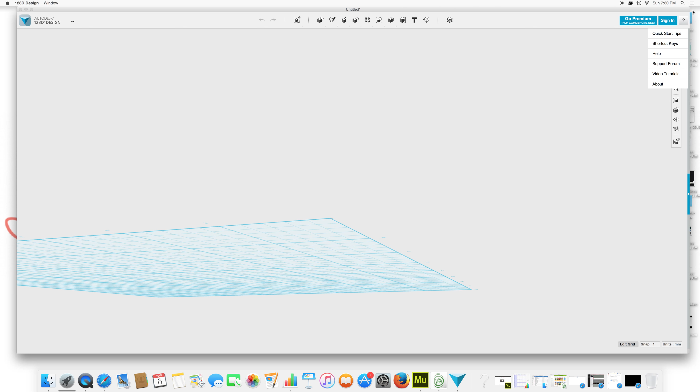First thing to note is to get familiar with your view cube. This will be your navigation around the entire page. If you ever get so far gone that you don't know what way is up, you just hit the little house, it returns to the center point.

Pan hand moves the page. Orbit is the same as the view cube. It just lets you go in one swift motion. I find it sometimes is the easiest way to get lost. So I like to slowly move the view cube. Your scrolly mouse will let you zoom in and out. You won't really need that zoom tool. You can just use your mouse.

Now, notes, measurements, whatever you're working in is fine. Just make sure it's consistent. You measure your glasses in centimeters, you work in centimeters; measure in inches, work in inches. Up to you. When creating, I find it easiest to use the polyline or spline tool and just draw what you need and then extrude it.

So, for example, if you were creating sunglasses, I'm just going to create my beautiful sketch as fast as possible just to get the idea of it. I'm using this as my centimeter grid, so measure out the space you need so that you know if you need your whole eye to be 4 centimeters. Note what 4 centimeters is in squares. Every square is 0.5 of a centimeter, if that helps.

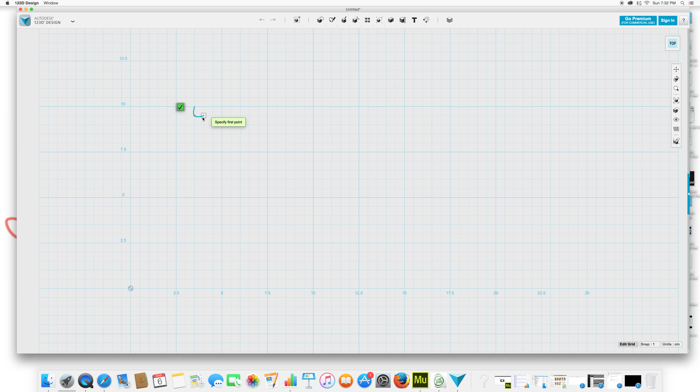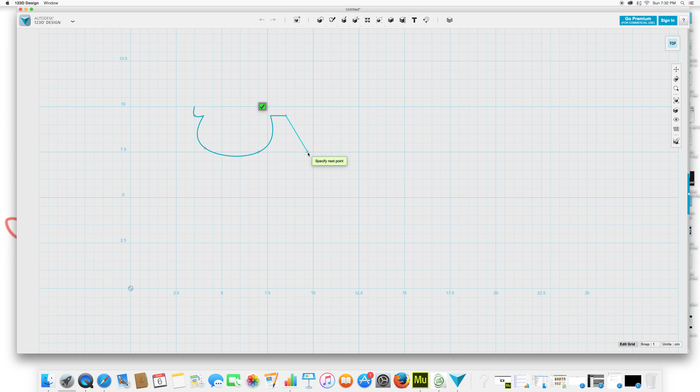So when making your awesome glasses, you're going to use a tool to create your shape. Now, I'm clicking between the polyline and spline by just double clicking. The spline tool lets you do curves where polyline is straight, but I'm on the spline so I don't have to keep changing it. So if I want it to actually be straight, I double click and then I just click to recontinue my shape. So here I went over 1.5, so 1.5.

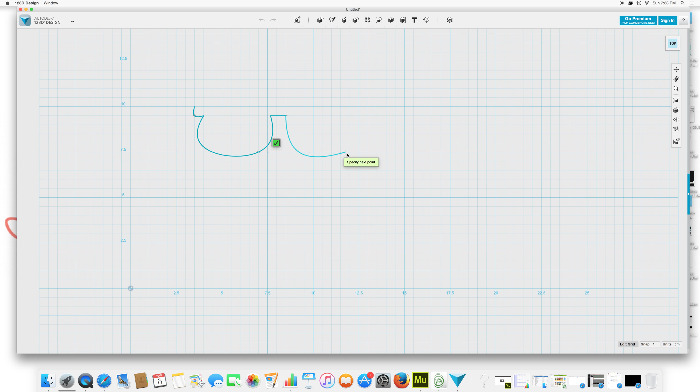Yeah, so sometimes it's really good to start mirroring and figure out what you are doing. So 1, 2, 3, 4, 5, 6. I like symmetry. 1, 2, 3, 4, 5, 6. Look at that. Beautiful. And again, for a straight click, you have to double click. So click twice, and then click back on it to continue. And then I have my lovely ending point. Let's go straight, click to continue. Voila. First step, close. Great.

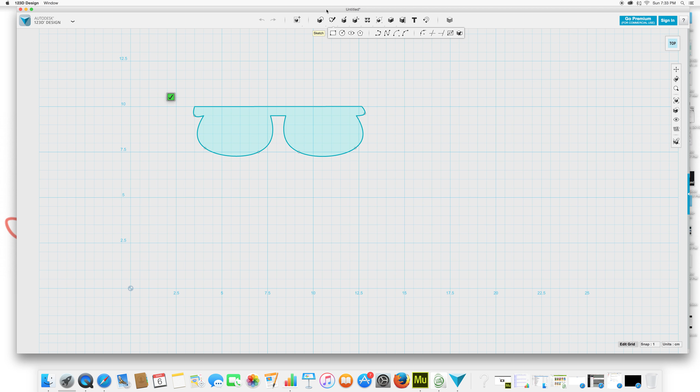Now I could then create my second sketch of where my glasses are going to be. Obviously, I want to see. I could easily use the ellipse tool to create the cutout, or again, I can freehand. It makes no difference, whatever you're more comfortable in. I find this ellipse tool sometimes more frustrating because you have to really know your measurements, per se. So I'm a visual person, so I like using the spline.

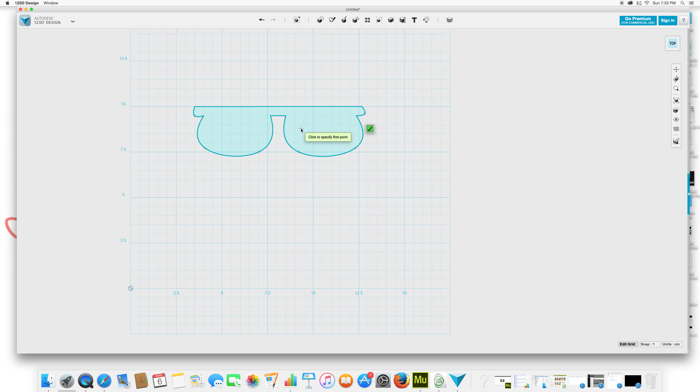But you're going to create basically an inside sketch and outside sketch. So you could choose to do it this way, and then you're going to create your second shell. Straight. Beautiful. Essentially what's going to happen is that you'll raise one and you won't raise the other. So please make sure you spend time measuring it. Obviously, I'm just eyeballing this right now, as if you do it per measurements, it will take a lot longer, which is great if you're actually planning on wearing them. But for the purpose of this tutorial, it would take too long.

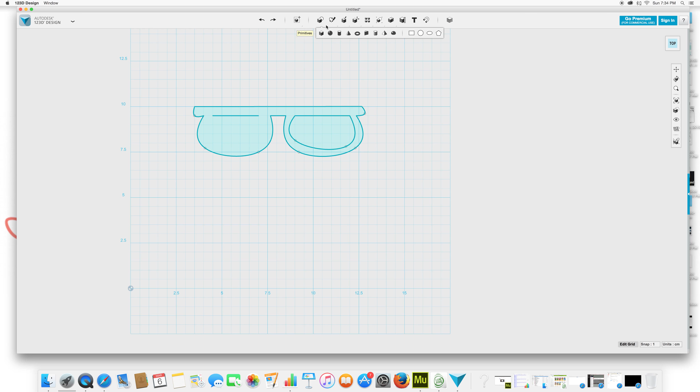So just note how far over your clicks are going to be for each thing. And I'm trying to be perfectionist for no reason. There we go. Okay, close. So now that I have multiple things, I go back to my move tool here. So this section here, they're all separate. So I can use my extrude tool and choose to focus on different parts.

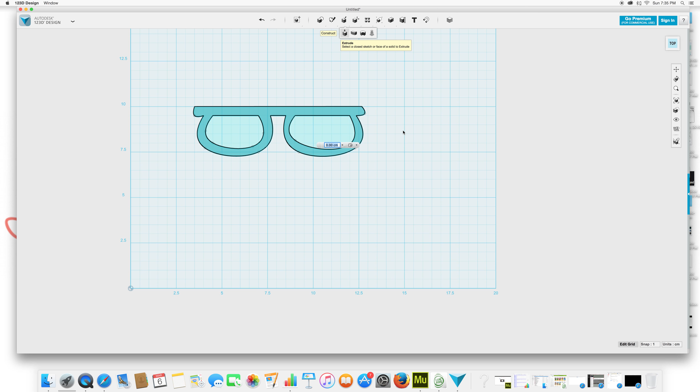I'm going to focus on this, and now here's your thickness of it. So note with the ruler, how thick do you want it to be? 1 centimeter? It might be too thick. I'm going to do 0.7 of a centimeter. And it's going to raise 0.7 of a centimeter. That's what that looks like.

Obviously, things to note. Currently, you are seeing my sketches, and you are seeing this as outline only. So if I hide the sketches, you'll see outline only. And if I show material and outline, you'll see our lovely glasses. Great basic frame to start.

Couple things to note. How are your hinges going to connect? Do you need a place for a hole to connect, or are you going to have a cutout that they connect in? Obviously, if you're going to have a place where they latch in, then you'll need to create that shape for it.

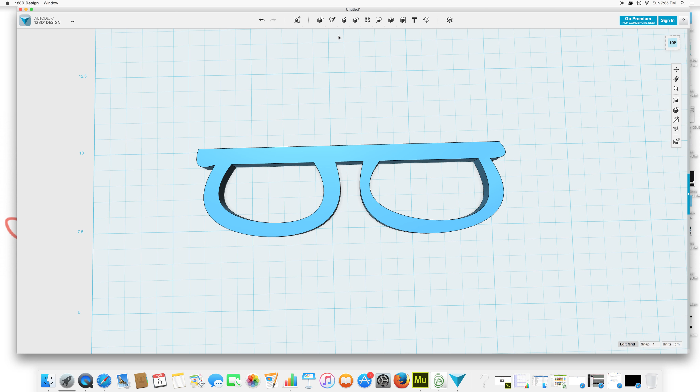To modify basic things, for example, if you wanted these glasses to not be flat and you wanted them rounded, zoom on in.

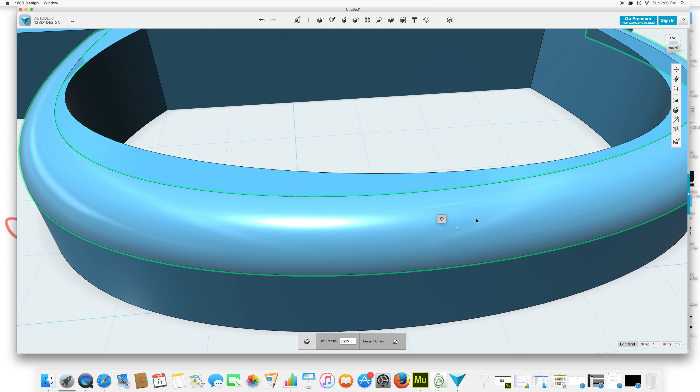Select the side and grab your fillet tool. Sometimes if you find you're too far out, it won't work, so I always zoom in to know what I'm doing. I find it's much easier to work with. Then you can start zooming out to actually see if it looks like what you want it to look like.

See, it looks different from very different angles, but that's what it actually looks like. It starts to round it. You can do it on all the sides. You just need to actually select the line. So first click is the shape, second click is the line, and then the fillet tool is rounded, chamfer is hard, and that creates your shape. You can look at the actual radius, so do the same for each one.

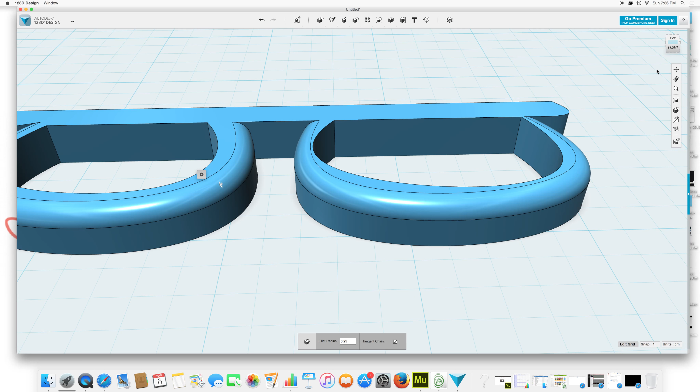And now we start to create it. It's the same process for your sides. Do one, and then extrude it twice. I'll do that really rough so you have a visual of what that looks like. But again, I don't know how you're hinging these together, so if you need to add an extrusion where they're going to have a little screw, or if you're going to have a hinge that they hook into, you have to decide that part.

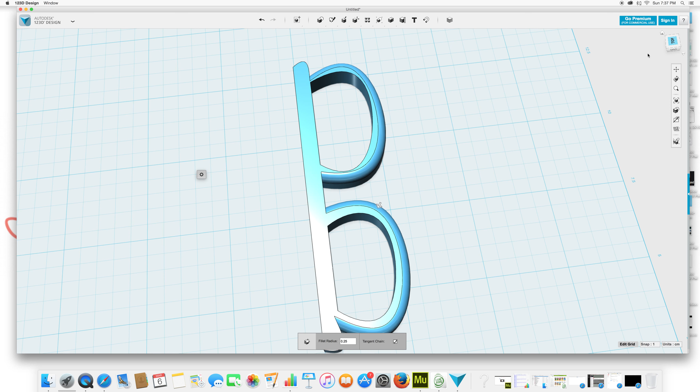I'm going to just move this page over, top view. Okay, for the side, I'm going to show you the exact same thing. I'm going to grab my shape, do from here to here to here.

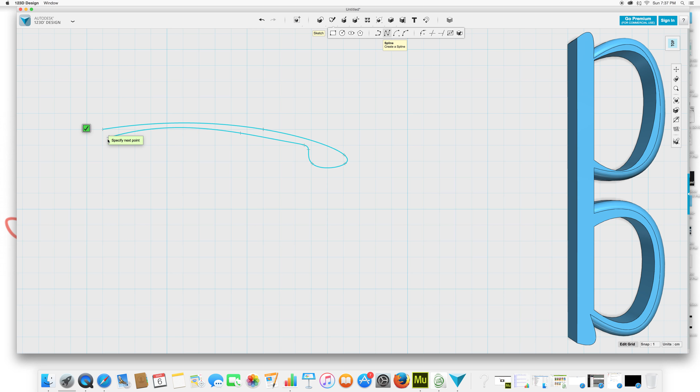Beautiful, close. So when you have this, as you want them to be symmetrical, when you do one right, all you need to do is extrude it twice. You'll extrude your one shape, the 0.7 that I have going on, and then I'll just move this out of the way. And then I'll extrude it again, so you don't have to design it twice. That's not needed. Then you'll go back to your extrude tool, select 0.7, go, and you'll have it there twice.

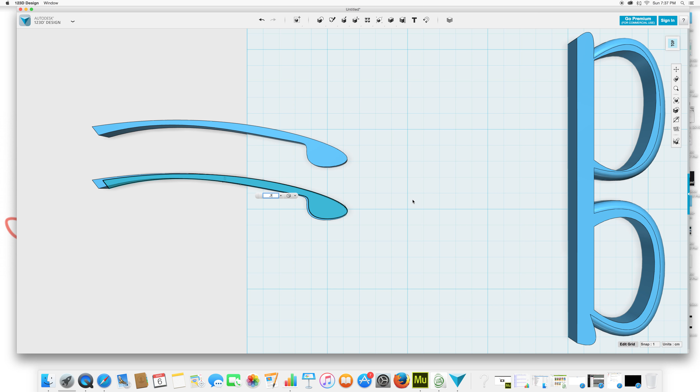Again, I'm going to hide my sketches, I just find sometimes they get in the way. So I have my two sides, my wings, same deal. But there's going to be a part where you add it. So let me do it over here and over here.

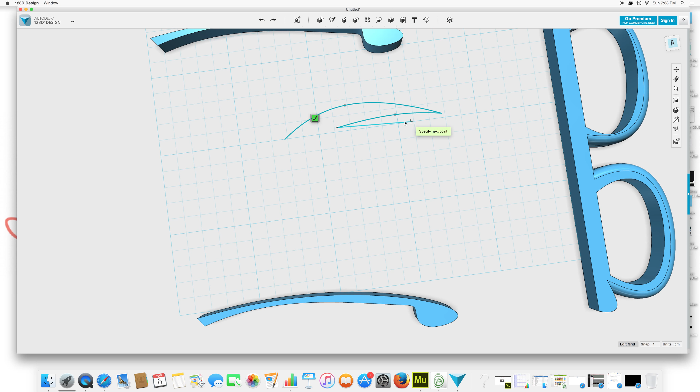So I grab my tool, I create my wing. Oh, that is so not a wing. Sorry. Sharp edge, there you go. Sharp edge. I'm just going to do 3 so it's done faster, but voila, beautiful wing.

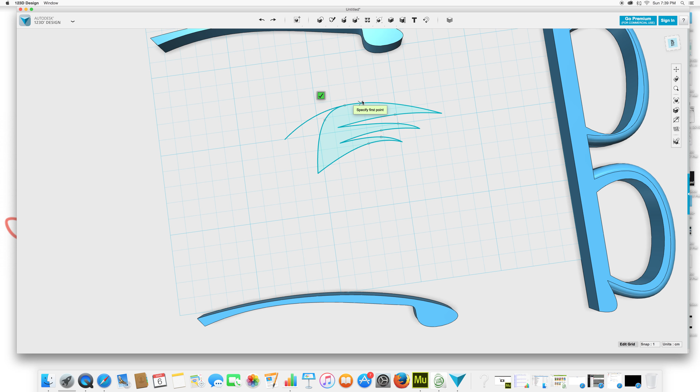Okay, let's say that's my wing, it's gorgeous, I know. Same deal, once you extrude it, it can be anything you want now because it's something different. So maybe it's just a thin add-on, it's 0.5.

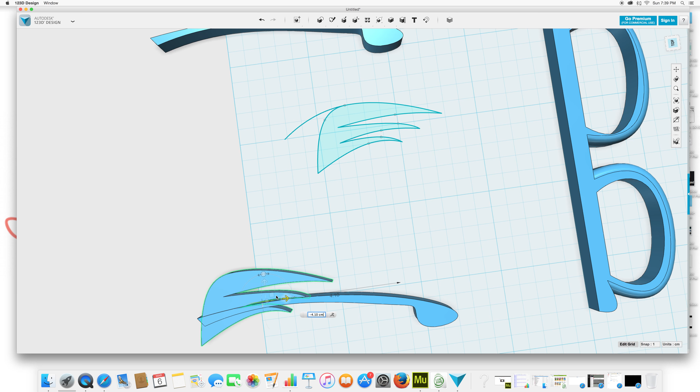This guy, you're going to use your move tool and move him, and move him onto where you want him to fall on here. You're going to need to use your view cube because you need to make sure it lines up from all angles. You can select your move tool from the top or the bottom.

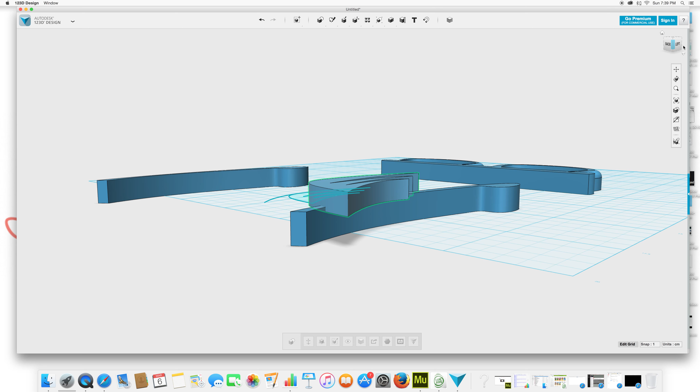But you're going to make sure that lines up properly, and then it's up to you if they intersect at all or just a little bit. But please, please, please check from multiple angles. It looks good on one and then it looks wonky from another, so make sure you go all the way around your view cube and that at every part it makes sense. When you have it the way you want, you're going to go up to combine and merge, take your first piece, take your second piece, enter. Now this is one piece, so it will print together.

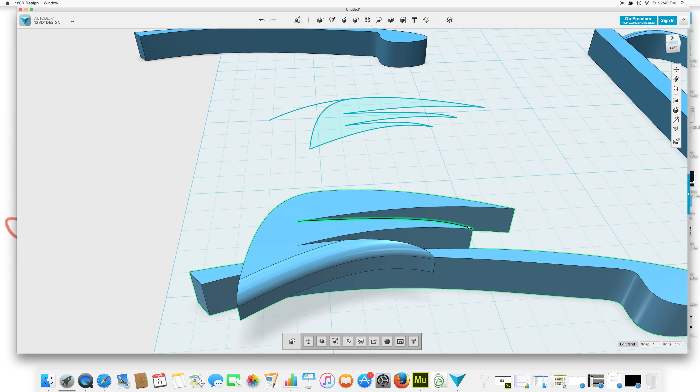The same deal still exists if you want to round pieces, if you'd like to add cutouts into it. You just have to actually have more lines if you want cutout parts. But that will add all the different effects for it, depending on what you're looking for. You can do that on multiple ones to different scalings, before or after you merge, just fine. Again, if you zoom in, you'll have less error signs. But that's how you create the basics of your glasses.